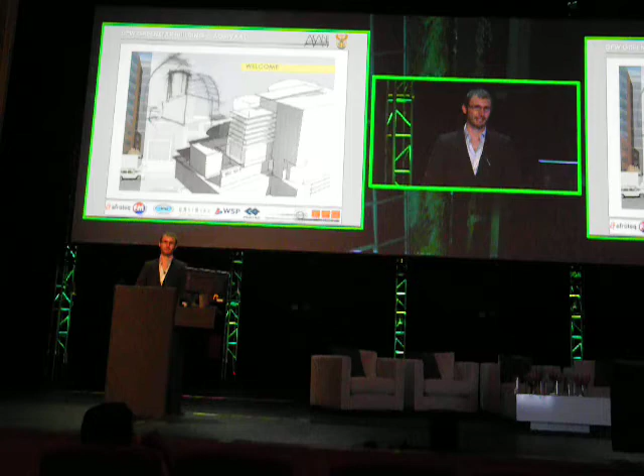Thank you very much for the opportunity. I'm here to present to you the first government, on a national level, Green Star building earmarked for Tshwane in the CBD. Now, in terms of the point of departure, what the brief called for was the development of an A-grade office space that could be sustainably designed and future-proofed.

Now, the importance there was that this building would remain feasible and usable in the long term, as well as an iconic landmark for the government, to not only fit the bill of a contemporary green building for the city and indeed the country, but also to set the trend for future government building and the built environment in general.

Our approach was a simple one. The government appointed us as part of a consortium, and you can see our range of logos there at the bottom of the screen, in which we came in as an integrated group, where we had the ability to integrate expertise from all ranges, including space planning, facilities management, and engineering, to bring together a collective expertise in developing this building from the ground up, making sure that we covered all bases and were able to address all potential problems from the onset. The proposal for this building is then also to achieve an as-built rating in the future.

So in terms of where we are, having a look at the Tshwane CBD, the site has afforded a number of important attributes. The first and foremost being its proximity to the Union Buildings, you can see there in the center of the screen. The site, in fact, lies within 600 meters of the Union Buildings, walking distance, one could say.

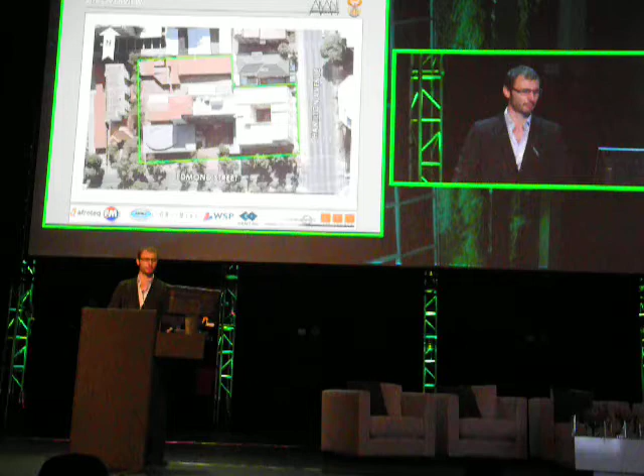The site choice was a result of an option analysis done of a variety of sites. And this site was chosen not only because of the points I've raised previously, but because it had no ecological value to pose any problems. And one can see that the site itself was already readily developed upon.

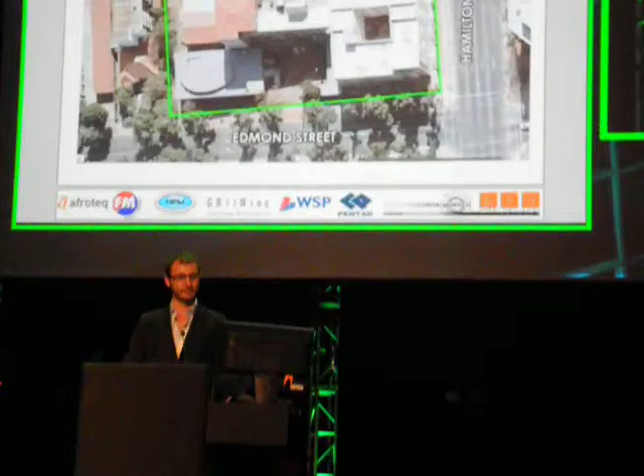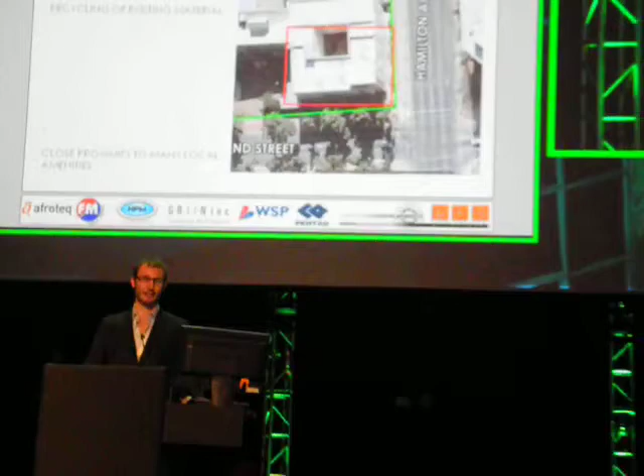The entire footprint of the site was in reception of degraded and dilapidated buildings, and one of the surprises that emerged out of the design process was that a portion of the existing building actually needed to be retained due to historical significance. In fact, the challenge this poses is that not only would we need to renovate and restore this building, but integrate it into the final design proposal.

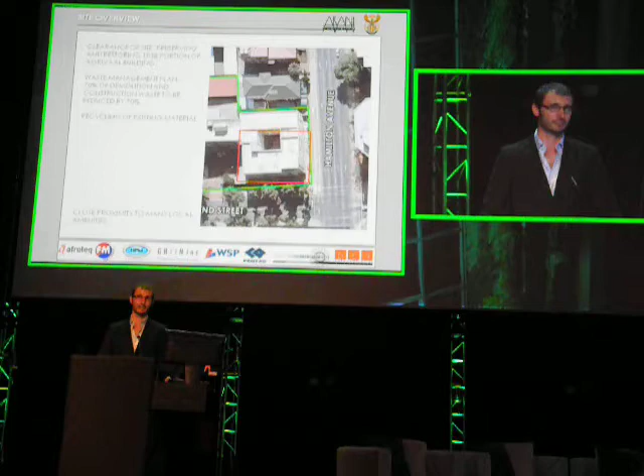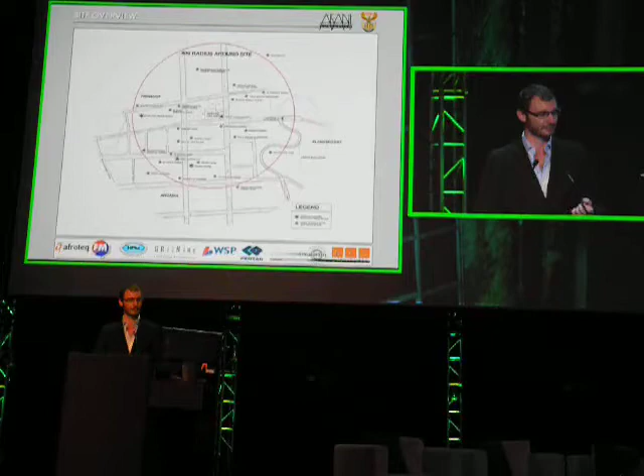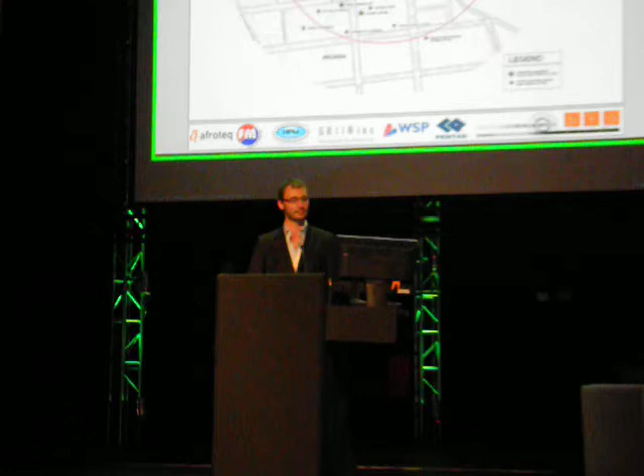So the clearance of the site was earmarked with a waste management plan in place for 70% reduction of waste and a recycling of the existing material wherever possible. The close proximity to local amenities also meant that this building serves an iconic role in the scope of the city, due to the fact that not only will it be drawing upon the local amenities of the surrounding area within 400 meters, at walking distance, but we envisage that the building will also seek to catalyze an urban regeneration within its immediate local context.

So there's a symbiosis that's been developed between the site itself and its local surroundings. Not only will the local infrastructure and public be receptive to improvements, but also the building itself will draw upon these for eventual and long-term success.

So the project is multifaceted. There's demolition, restoration, partial renovation, and construction of a new building. It really encapsulates the full spectrum of architectural engineering challenges.

This building is seeking to operate at the forefront of current building technologies and building management systems. This building, once again, is an iconic project to set the trend for the future of government buildings and the building industry in general.

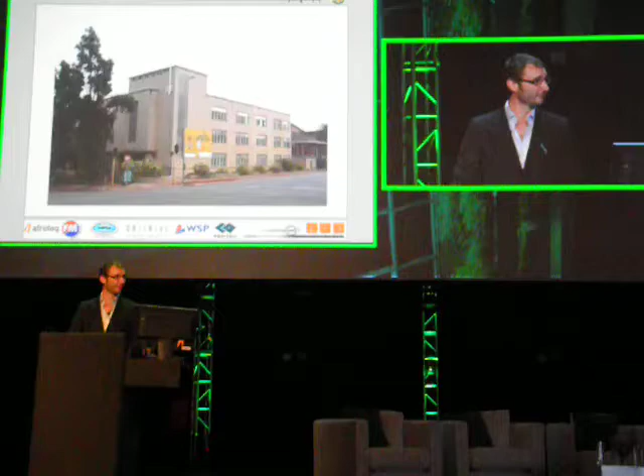So this is what we were presented with. This is the existing Agrivaal building, which gave its name to the project, as mentioned previously. In terms of where we started, the vision quickly emerged of how we would latch onto this building and how the interrelationship between old and new would be represented in this new vision for architecture in South Africa, drawing upon the lessons of the past.

This is a view from the southeast. One can see that we also used the proportion and the shape of the existing building to influence and form the proportion and shape of the new building, with the lower podium giving rise to a new fluid and curved shape rising into the CBD skyline.

A variety of materials have also been used on the exterior for purposes of low maintenance. We've indicated large glass surfaces, aluminium, as well as off-shutter concrete and face bricks. This means the character and aesthetic appeal of the building will be preserved for its entire lifespan, which should be, in our opinion, for a generation or two at least.

We've also managed to earmark specific locations for solar shading and aluminium louvers where deemed critical. The success of this project as an icon is also the fact that it really departs from the aesthetic of existing buildings in and around its area by a large degree. It's going to be something special, something unique to the local landscape.

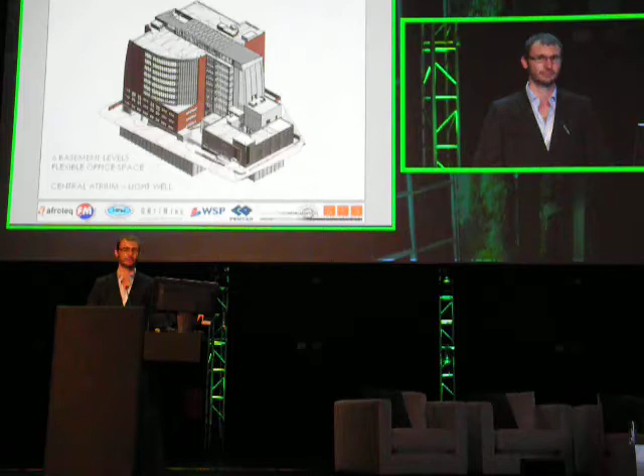The building has 6 basement levels which corkscrew their way down to earth, and the beauty of that corkscrew is that it actually creates within its center the opportunity to centralize the services to the building. There's a central atrium as well, which we designed in close collaboration.

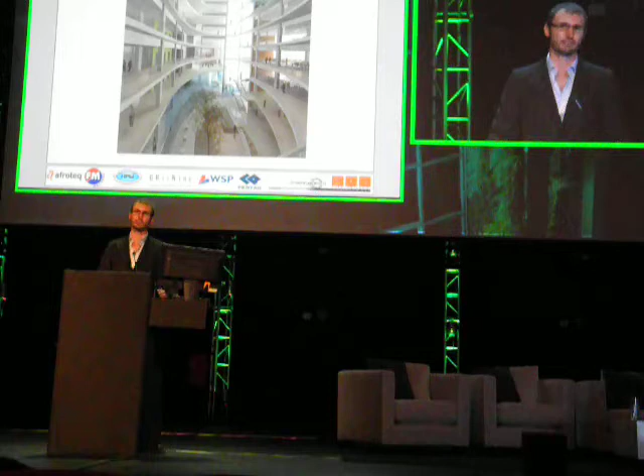With feedback from the green consultants, we sought to drive natural light as far deep into the interior of the building as possible. Due to the fact that the building is roughly square in shape, we wanted to create vibrant light interiors that would create an amazing entrance look and feel, but also visual communication between all spaces on the interior, creating transparency of this government department to the public, where we could centralize all circulation around the central core, which is naturally lit, while also maximizing natural light to its fullest potential.

Indoor environmental quality: we saw a 50% improvement on fresh air requirements as per the national building regulations, with carbon dioxide monitors at all levels. 60% of our office space has a view, and of that 60%, we actively designed a reduction of glare by 80% to these spaces. PMV levels are kept between -1 and +1, with low volatile organic compounds used wherever possible.

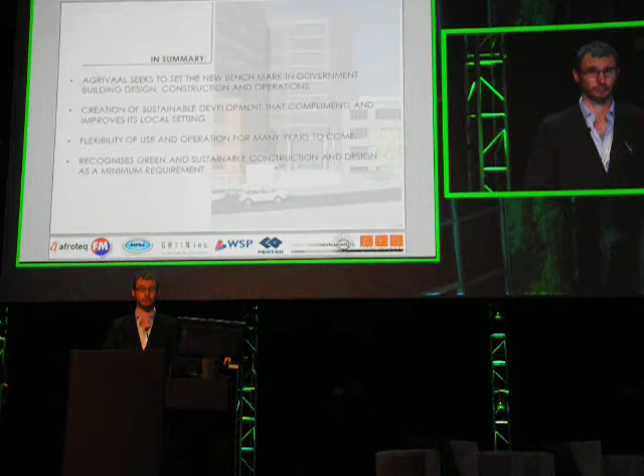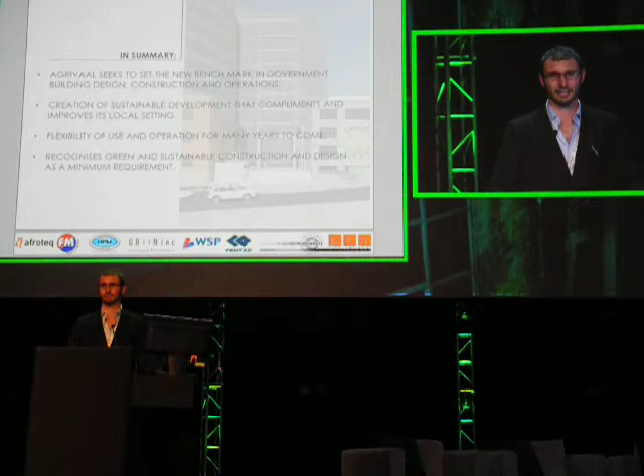So in summary, Agrivaal seeks to set the new benchmark in government building design, construction and operations. It is the creation of a sustainable development that complements and improves its local setting, which is very important, with flexibility of use and operation for many years to come. Not only will it do its job well now, it will carry on doing its job well for the foreseeable future. This building needs to remain useful to the local government as well as the public for way past our generation's time, we hope. And it recognizes that green and sustainable construction design is no longer a nice to have, it's a minimum requirement, it's the way forward. So thank you very much for listening, we hope this has been informative.

Certainly has been more than informative.